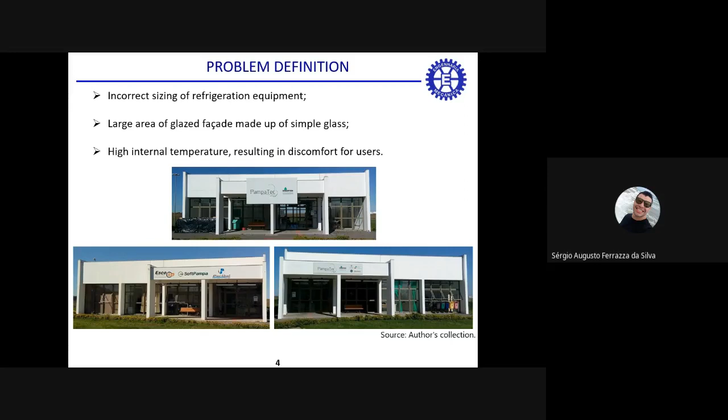Problem definition. The following issues have been identified in the Pampatec. Incorrect sizing of refrigeration equipment. Large area of glazed facade made up of simple glass. High internal temperature, resulting in discomfort for users.

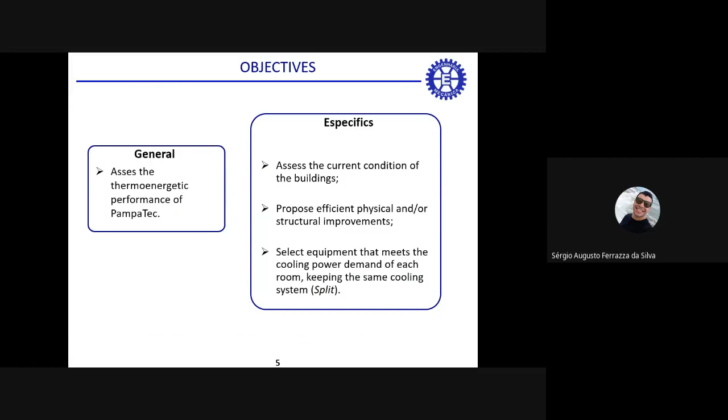Objectives. The general objective of the work is to assess the thermoenergetic performance of Pampatec, and the specifics: assess the thermal energy, assess the current condition of the buildings, propose efficient physical and or structural improvements, select equipment that meets the cooling power demand of each room, keeping the same cooling system, split.

Theory. Thermal comfort can be defined according to ASHRAE 2010 as the condition in which the mind expresses satisfaction with the thermal environment, where there is thermal balance between body and environment, and the body presents low sweating.

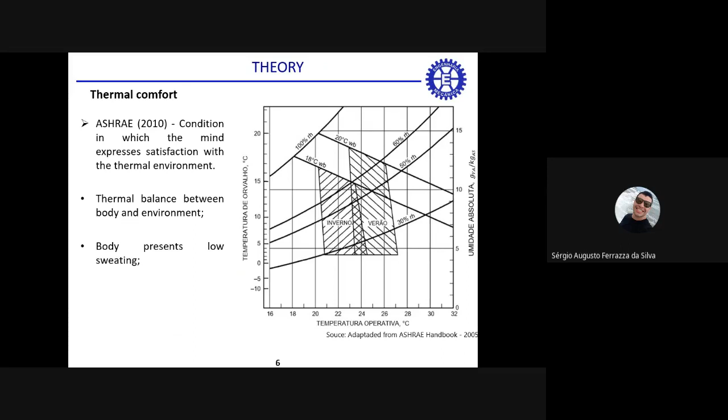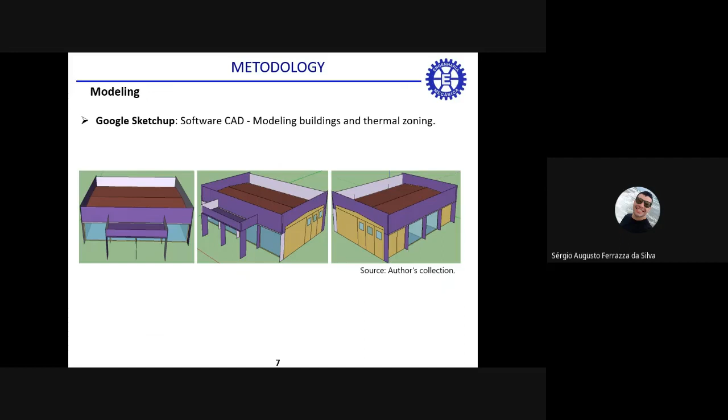Methodology. The building was divided in independent thermal zones with the help of Google SketchUp software as shown below. A thermal zone is defined as a single air control volume with homogeneous temperature. The EnergyPlus software simulates the interaction of all thermal variables that influence the thermal zone, considering all forms of heat transfer involved: radiation, conduction, and convection.

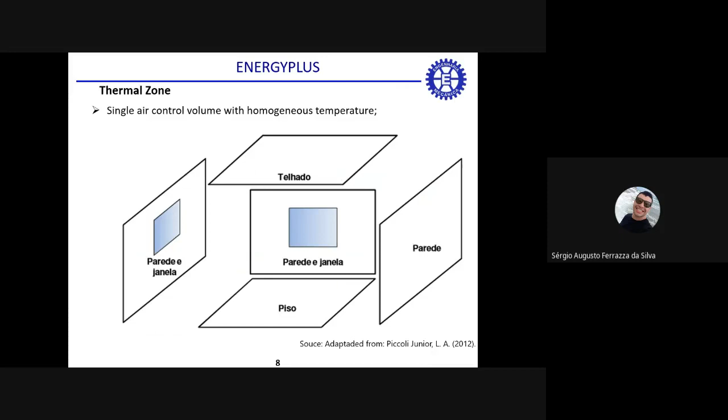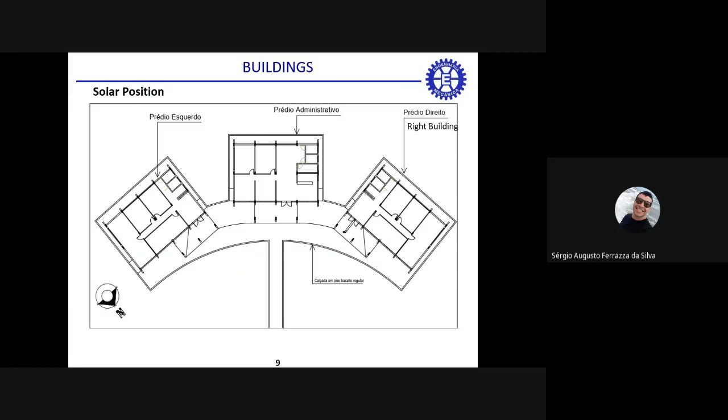Solar position. Here we see the building solar position. On the right, we can see the building studied. The thermal zoning was done according to the building project, considering each room as one thermal zone.

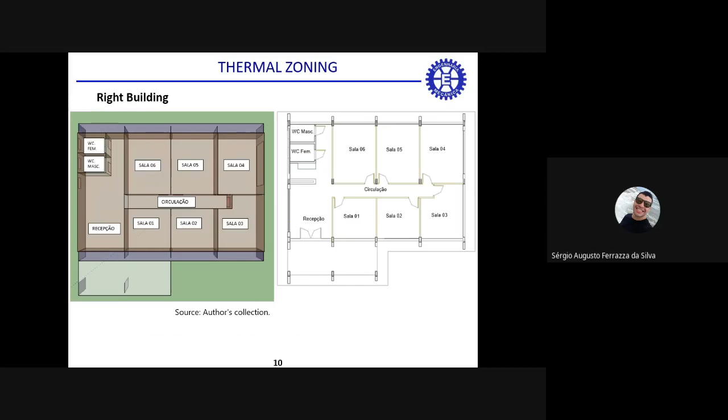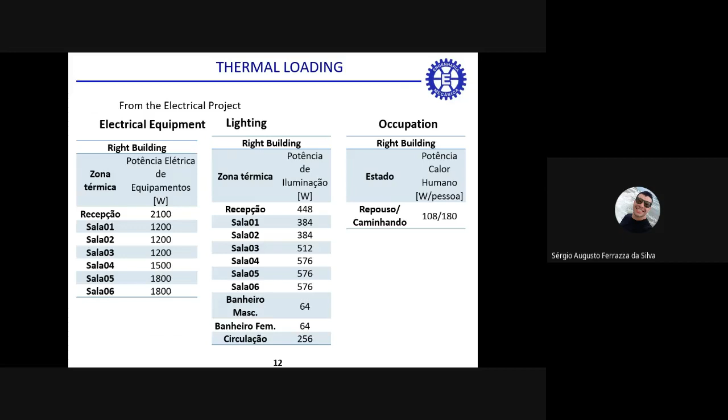Thermal loading. The thermal loading consists of heat added to the air control volume, like electrical equipment, lighting, and occupation. Here we can see the values obtained for each component of the thermal load for their respective thermal zones.

Simulations. Simulations with three main focuses were carried out. Simulations without changes, addressing the automatic sizing, auto size, of the refrigeration system and using currently installed machines without any improvement. Simulation with suggestions for improvements. Films, where four film configurations applied on the glasses were simulated using automatic sizing, auto size.

LED lighting, simulation of the best film condition replacing current lighting with LED light in auto size mode. And simulation with selected machines, simulation of the final suggestions for improvement with the appropriate commercial equipment to ensure thermal comfort in all thermal zones.

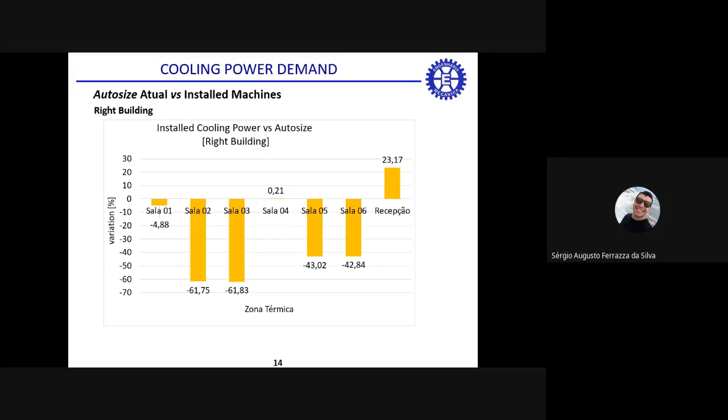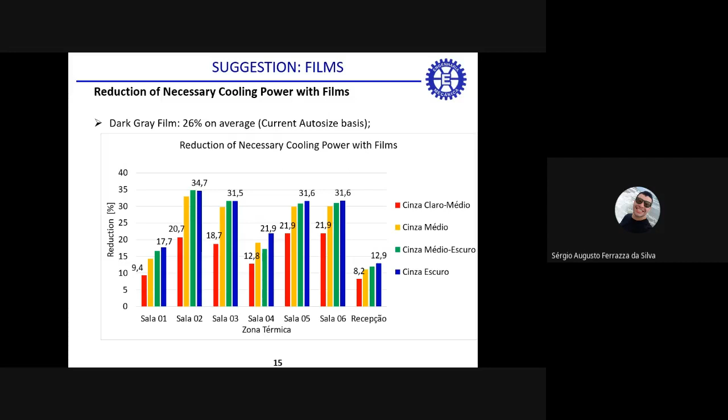Cooling power demand. The graphic shows the percent difference between the actual demand for cooling power and the installed power in each thermal zone. Suggestions, films. The reduction in cooling power demand was 26%, considering the current Autosize basis.

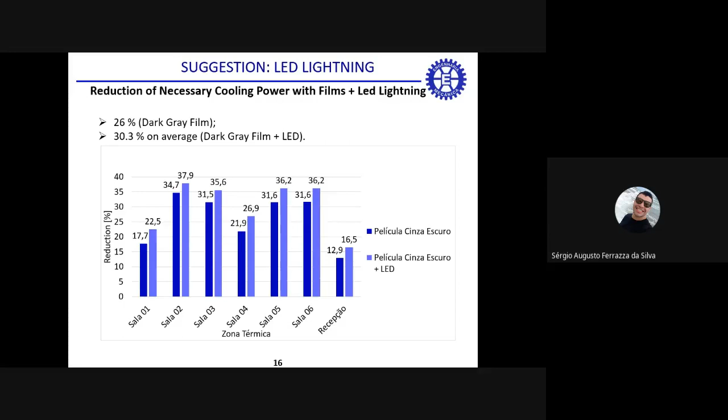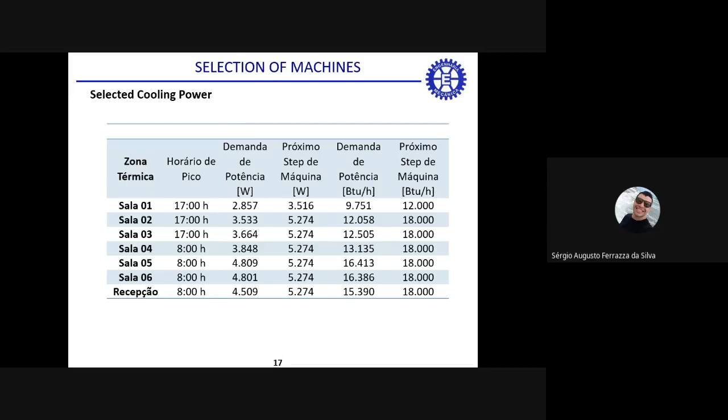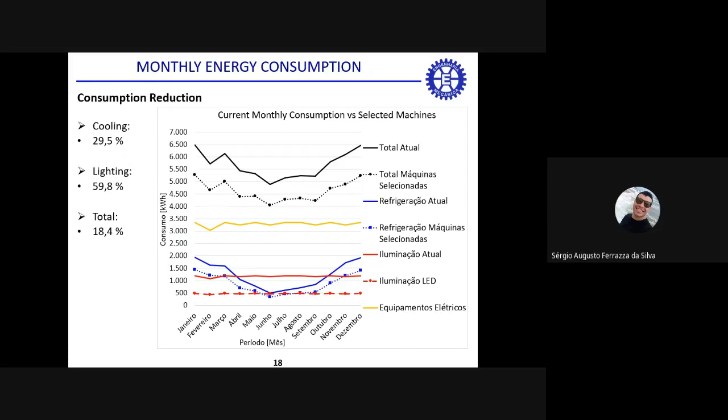So, conclusion. The study proved that the suggestions for improvement, together with the correct selection of machines, can keep the temperature at 24.5 degrees Celsius in all thermal zones and provide a reduction in the consumption of electricity for the building.